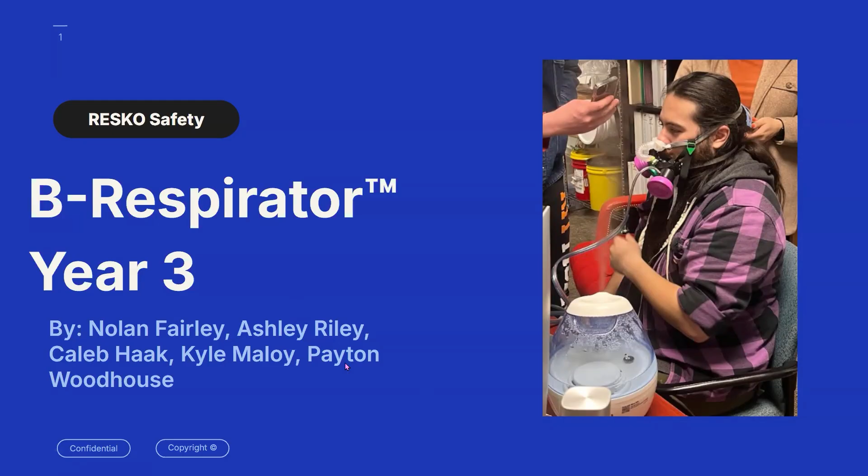First, we're going to do a little member introduction. My name is Nolan Fairley. I'm one of the mechanical engineers on the team. My name is Kyle Maloy. I'm the electrical engineer of the team. My name is Caleb Haak. I'm another mechanical engineer. I'm Ashley. I'm a biomedical engineer. I'm Payton Woodhouse. I'm also a biomedical engineer.

Right now, we're going to go over a problem statement and team objectives. We are working with Resko Safety to create a respirator that bypasses the typical skin contact seal that is common with most commercially available half-face respirators. The key goal of this project is to create a design that is comfortable and easy to breathe through and passes industry-standard testing for respirators to ensure protection for the user, as well as improving comfort and compatibility with other PPE products we may see in our client-decided workspace.

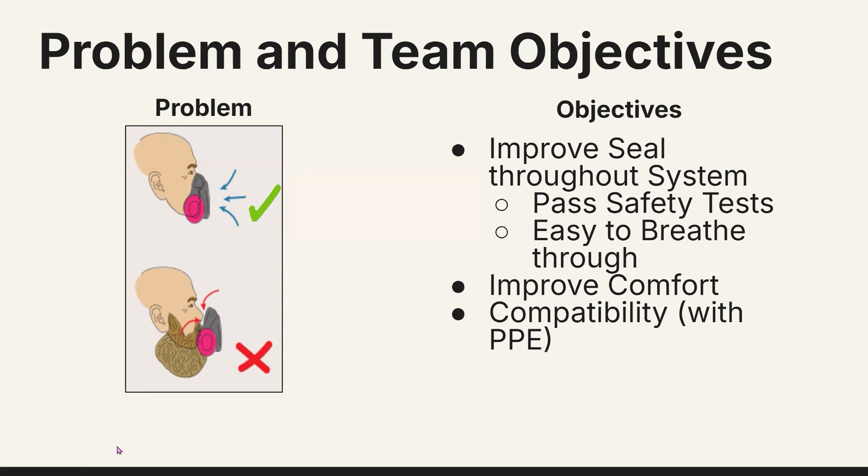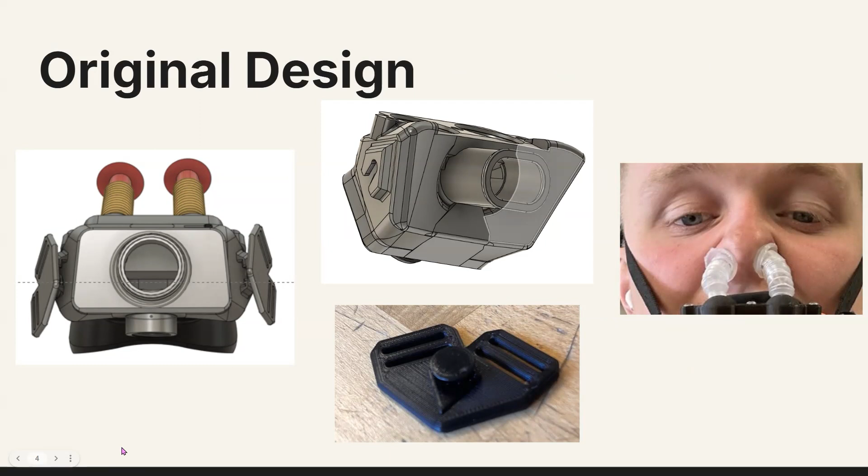As previously stated, this product has been in MSD rotation for the past 2 years. Shown above is the end of the second year prototype, which is showing a small face fitting respirator. The original prototype was designed with a single filter, no one-way valve, and a flexible bendy straw style connector. It intended to use a self-molded nose pillow and even included a saliva drainage feature that we later found unnecessary. This iteration failed quantitative PortaCount fit testing because of the poor sealing and unrestricted airflow.

So as Nolan mentioned, our two biggest goals for this new body were to increase the seal and to increase comfortability through improved airflow and fit on the face. Here you can see our progression of the different designs that we created. We started off by adding multiple different components to help us achieve the two previous goals, mostly by adding a second filter, as you can see by the two threads on the design on the left. We also added a one-way valve and improved the nose connection, which we will get into more later in the presentation.

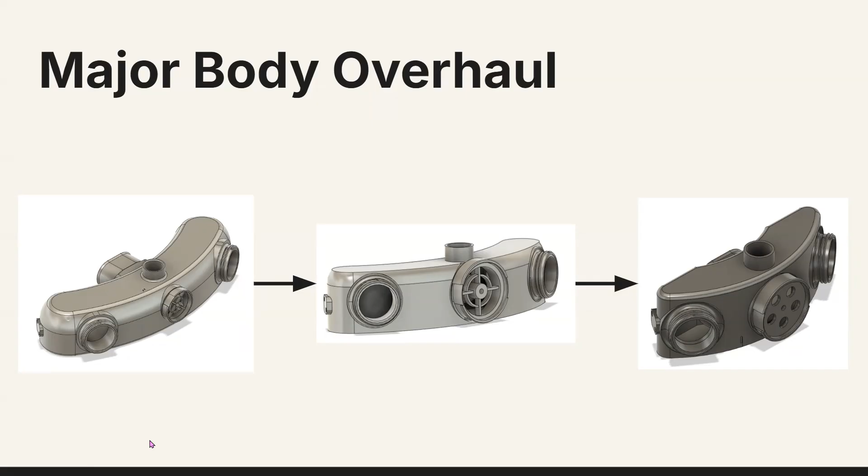Then from there, we took this design with all the components. We saw how bulky it was on the user's face. And so to increase comfortability and just overall look and compatibility with other PPE, we made further designs that slimmed down the design until it was the smallest that we could make it, and it felt the best on the face. Here you can see the final design that we made. It has a lot of improvements.

Here you can see the aerial view. It's our most compact design. It's curved to fit the contour of the face. We took the mouthpiece connection and we pushed it further into the body of the respirator to decrease the extension of the respirator off of the face. This decreased the weight felt by the user, so it improved the comfortability. It also decreased the extension off the face, so it allowed for other PPE to be worn with the respirator, such as a face shield.

We also added grooves around the base of the threads for the filters to allow for O-rings to be placed beneath the filters and decrease air leakage in between the filters and the respirator to improve our seal.

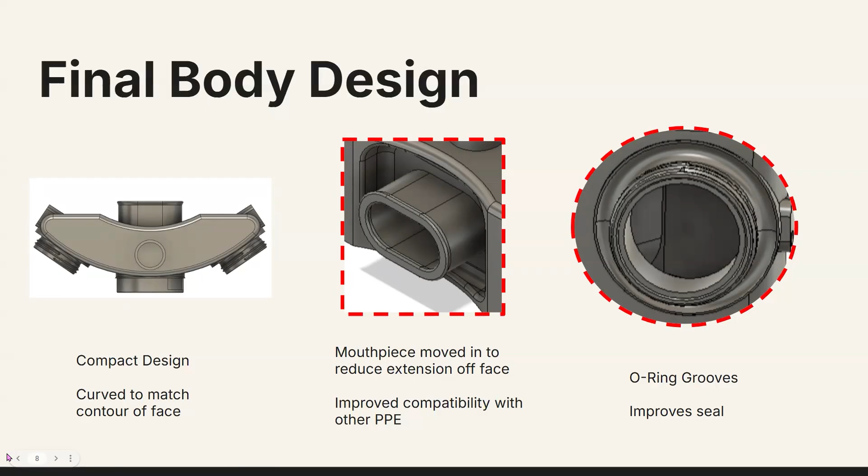To increase the durability of the device, we also added a different way to connect the straps. In the past, the strap connectors were pushed into these slots, but doing that repeatedly would often break either the respirator or the strap connectors. So we moved to a thread and screw design where we inserted threads directly into the body of the respirator and put screws through little holes in the strap connectors so that they could be removed and replaced easily without worry about breaking the device or the strap connector.

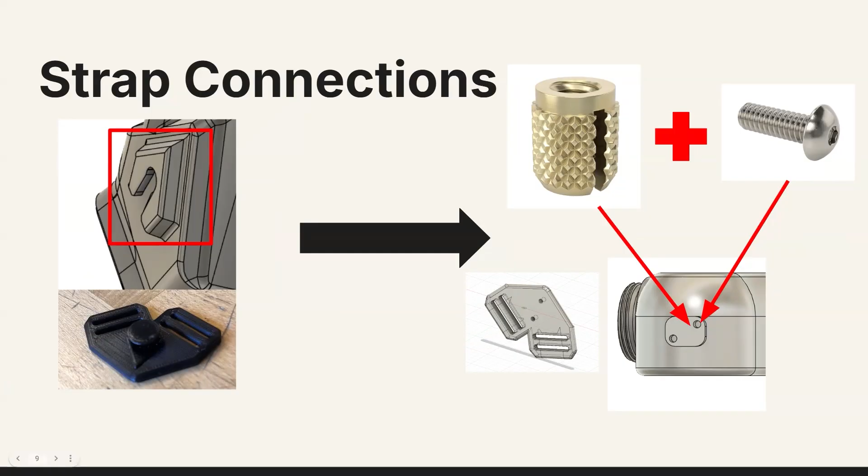As Caleb said, we did implement a one-way valve into this current design. This was due to failures that were happening around the mouth and nose piece when the user was breathing out. This implementation of the one-way valve created a designed exhalation point for air when the user was breathing. There were 3 different designs that we tested throughout this process. The first you can see on the left; we ended up implementing the third in our final design as it increased the amount of surface area and decreased the likelihood of air leaking after the user breathes.

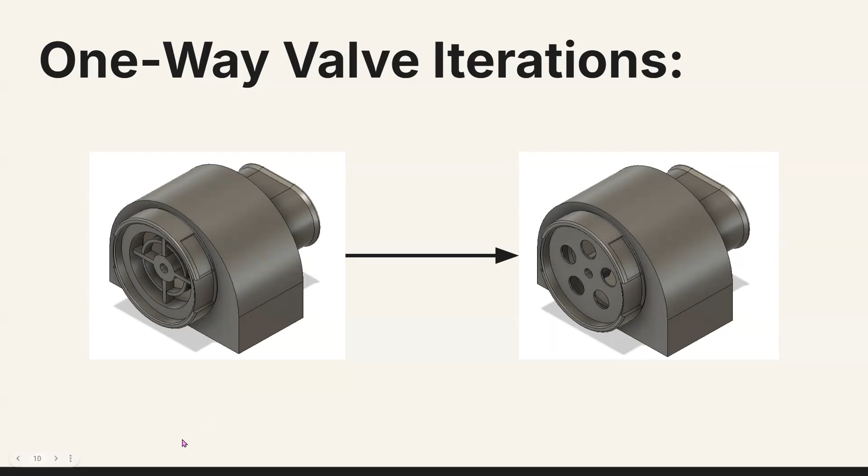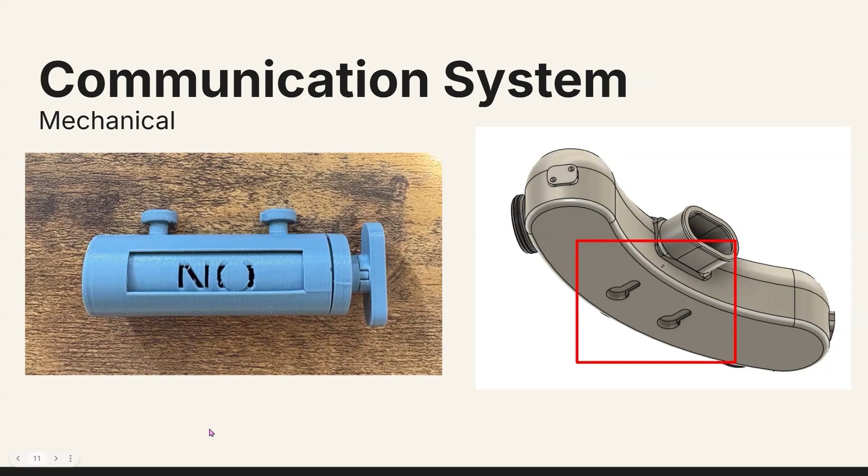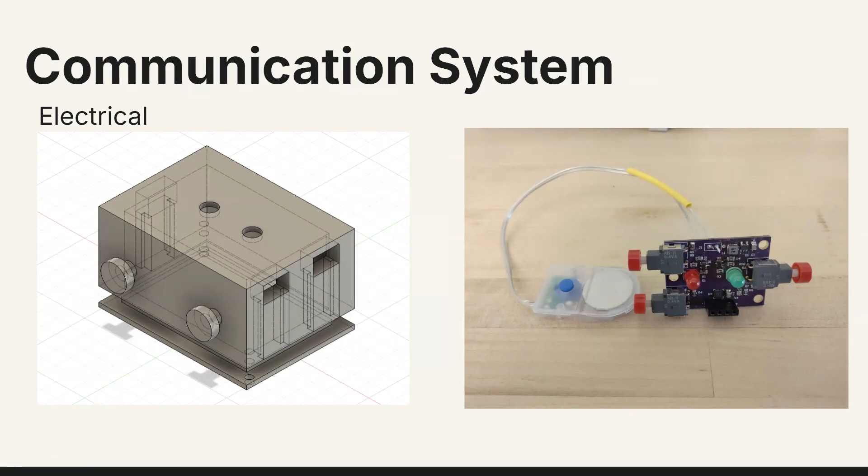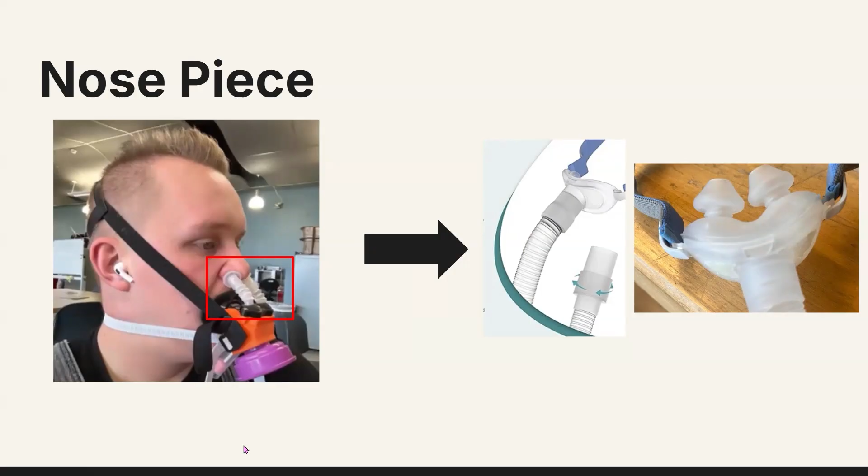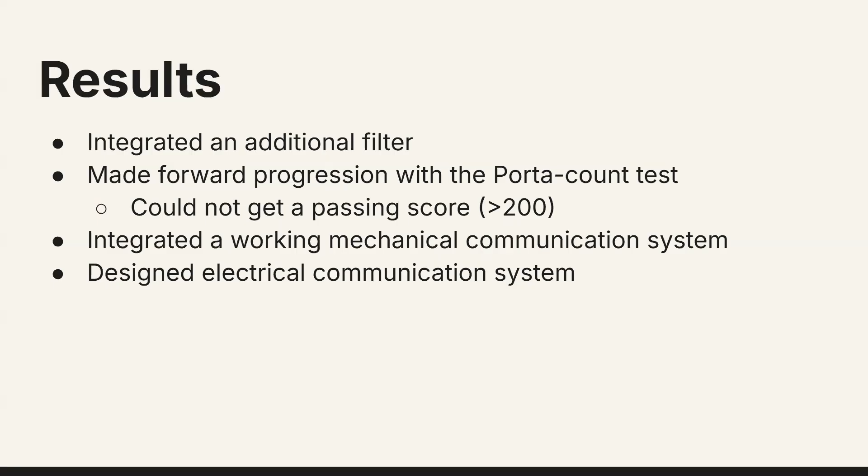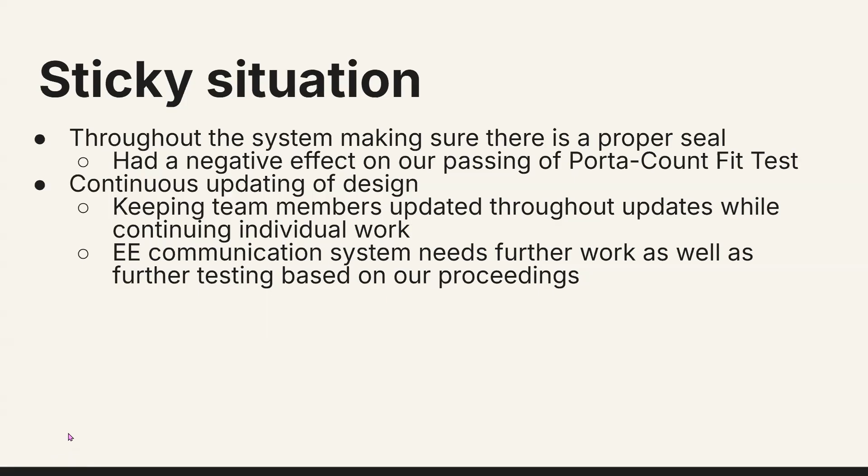Finally, just a special thanks to Phil Vancheri for helping with the PortaCount fit test as well as feedback, and a special thanks to our client Joe Algier for feedback and support throughout the entire process.